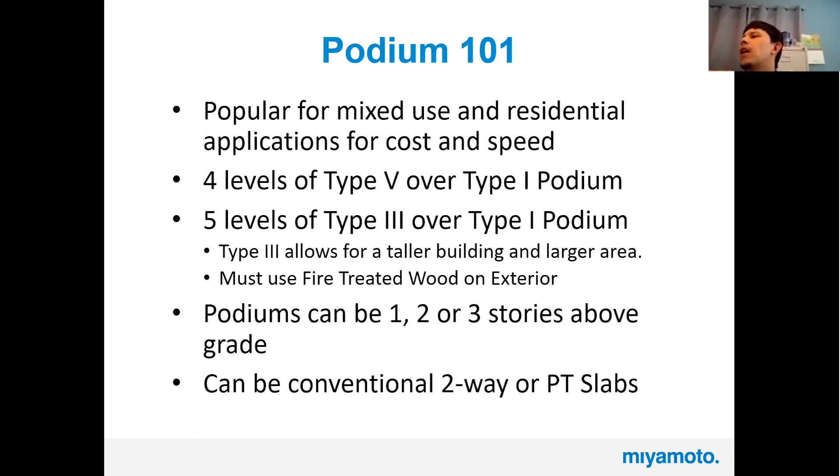The podium itself can be conventional, mild reinforced concrete slab, or it can be a PT slab, and I'll go over the differences here. PT slabs, very economical for multi-story residential and parking, especially if you've got a regular grid layout and multiple floors. You get some economy of scale. You can reduce slab thicknesses significantly, especially if you've got parking and or residential live load where you're talking about 40 or 50 pounds per square foot.

When it comes to an actual podium where you're placing a 4 or 5 story building on top, the loading is significantly higher than you would have in a traditional high-rise concrete building. And so there you're not going to get that big of a decrease in slab thickness when you do PT. PT also, we can do longer spans. We can have longer cantilevers. And because the slab is tensioned, there's going to be less cracking.

The drawback is that with a PT slab, making modifications to it in the future, you need to always scan it to locate tendons before you core and drill. So on our projects in Southern California, usually in a mixed use project where we have commercial and retail use, the client does not want to have a PT slab because the tenants change. It could be a restaurant. They're going to core lots of holes. And as the tenants come and go, they all make modifications. And they don't want to have to go back and scan the slab every time they do that.

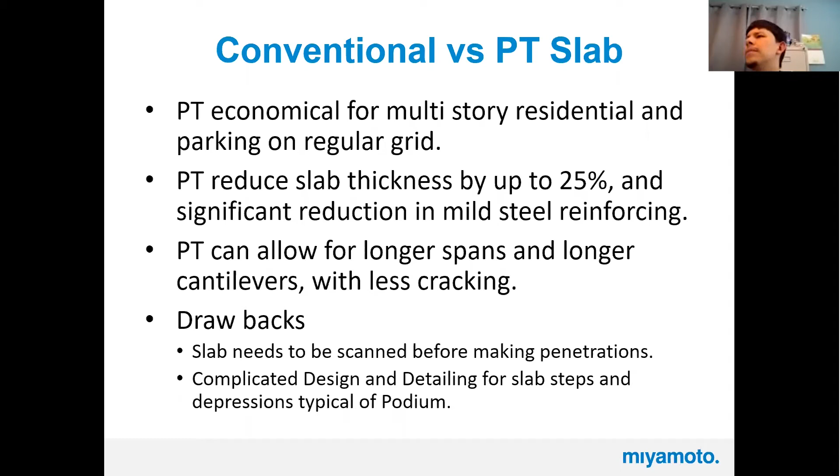The basis of the podium is that we're going to be able to do low-cost wood construction on top of the concrete podium, and we do that with this 2-stage analysis procedure. Most people just take it for granted that they're going to be able to apply this, but you do technically have to check. I've had trouble, especially with double podiums. It's turned out to be really, really close that we actually meet this requirement of the podium being 10 times stiffer than the wood superstructure.

So that will kind of be a function of how open the floor plan is on the podium level, because a lot of times, the architect is thinking that it's pretty much an open floor plan at the podium. They don't give you a lot of shear wall to work with. And then if you don't have enough stiffness there, and typically also the podium level is taller, right? So you have kind of like a soft story condition, then your stiffness may not be actually meeting this requirement. So you do have to be mindful of this.

When you get to a triple podium, it's even harder. And I've seen a lot of engineers, they've got different tricks for trying to meet this requirement. But just check it before you promise doing too tall of a podium.

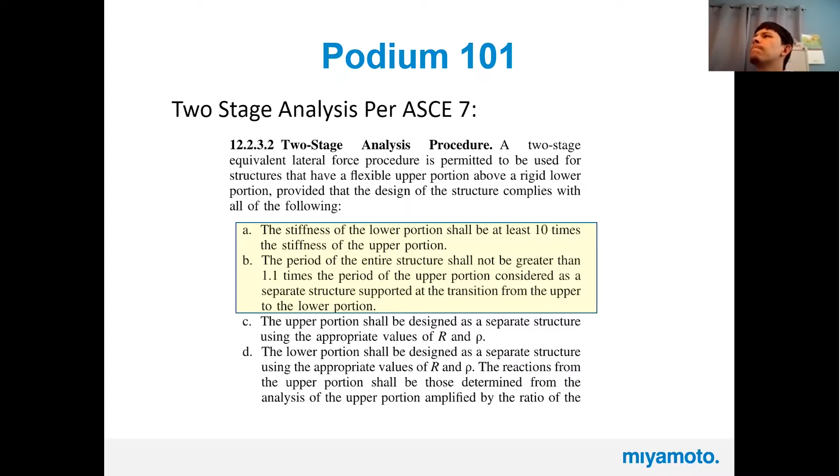And typically you're going to try to get your podium to work without drop panels and without edge beams and interior beams. It's usually a flat plate. So that's kind of where you start to get your preliminary sizing.

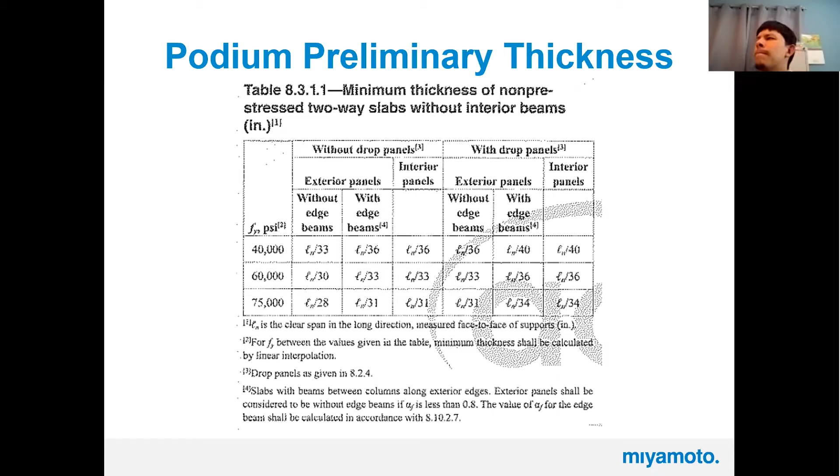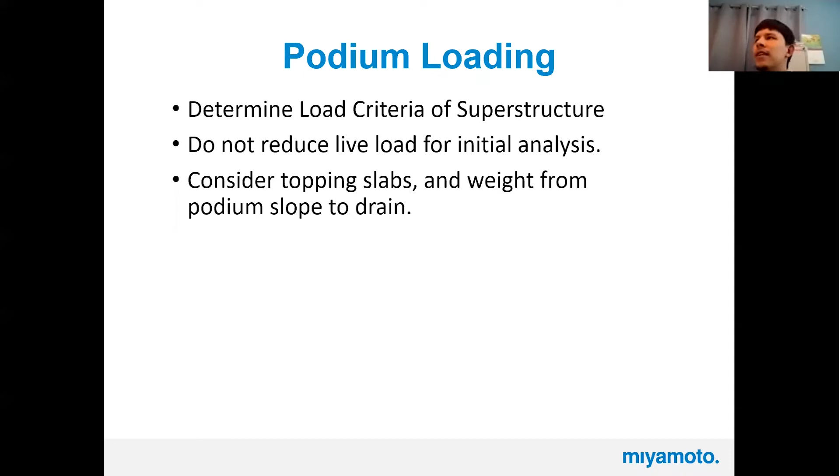Then you have to determine the load from the superstructure. When you do your initial sizing, I recommend that you do not reduce the live load. So, think, for example, if you've got 5 levels of residential framing, that's 40 pounds per square foot on each of those levels live load. That just adds up. So when you do that initial analysis, I would recommend that you do not reduce that.

And remember to consider all the other load that you might have. Something that's often overlooked is the topping slab thickness, or if your podium is having a variable thickness because it slopes to drain. So your podium might be 12 inches thick at the low point at the center of the courtyard, but it might be 18 or 20 inches thick at the edge of the courtyard, and that's going to add a lot of mass to your structure.

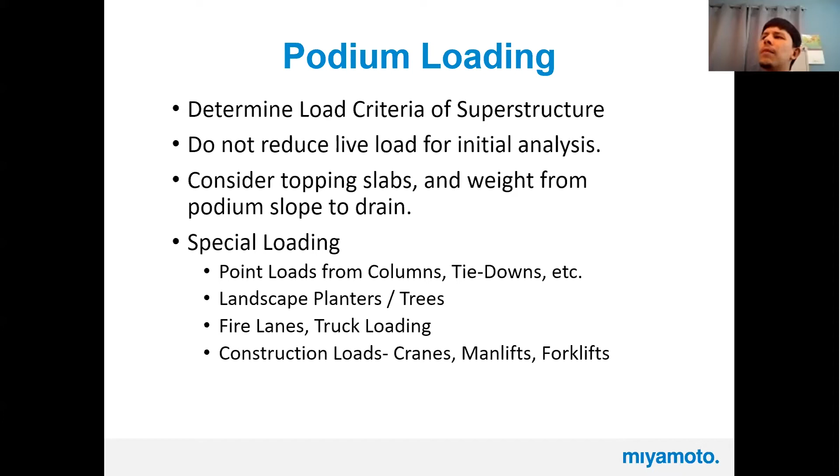The special loading that you'll consider in the design of your podium will be point loads from the columns, which you'll typically have at transfer areas, your tie down reactions from your shear walls, landscaping, planters, trees, fire truck loading, and then another thing that comes up is construction loads for cranes, man lifts, forklifts, that kind of thing.

As you get into the design, you're going to then have to figure out whether you need drop panels. And this is the first technical area that I want to get into. A drop panel has a very specific definition in ACI 318. Basically, a real drop panel is sort of a flexural drop panel. It will increase the flexural stiffness of your slab. But in order for you to reduce the amount of flexural steel you have in your slab, you have to meet the minimum dimensions in this code section.

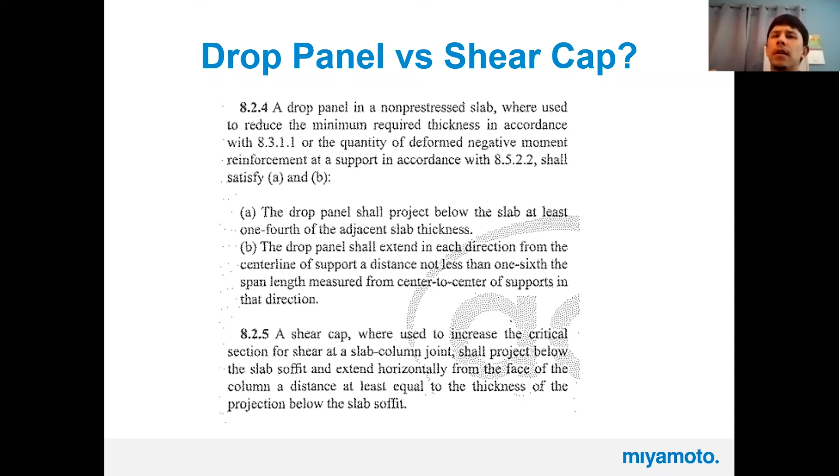And the reason why this is important is because SAFE does not know that. So when you model a drop panel in SAFE, it's going to account for that stiffness, and it will adjust the amount of reinforcing when it designs the slab for you.

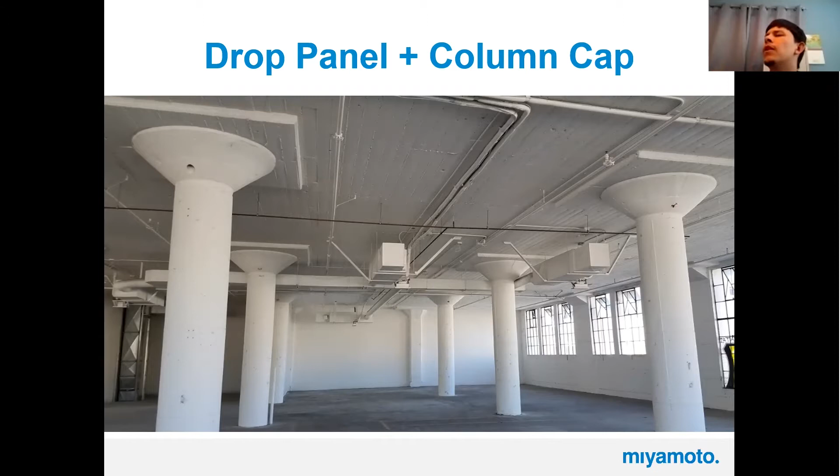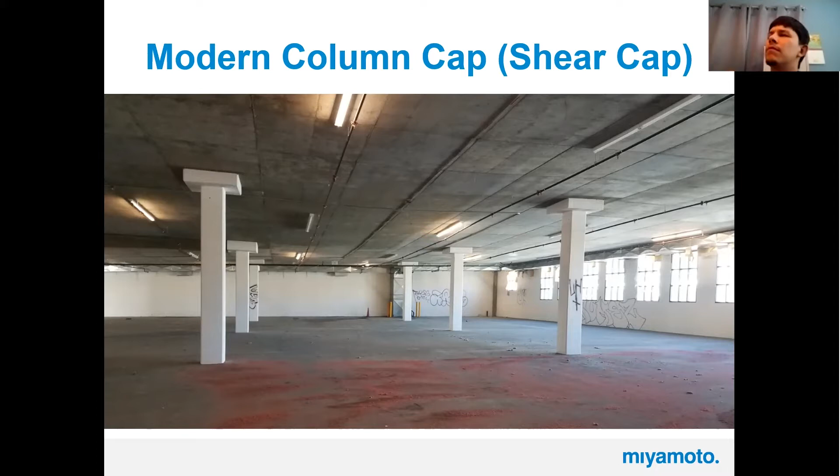So in the old days, this is how they would build a slab. You can see there's sort of a conical column capital and then a drop panel that goes around it. And then, in more modern construction, a column capital would be square because it's easier to form, and typically just placed to handle punching shear. But if these were going to be used as flexural drop panels, they would have to be much larger to meet that span over 6 ratio.

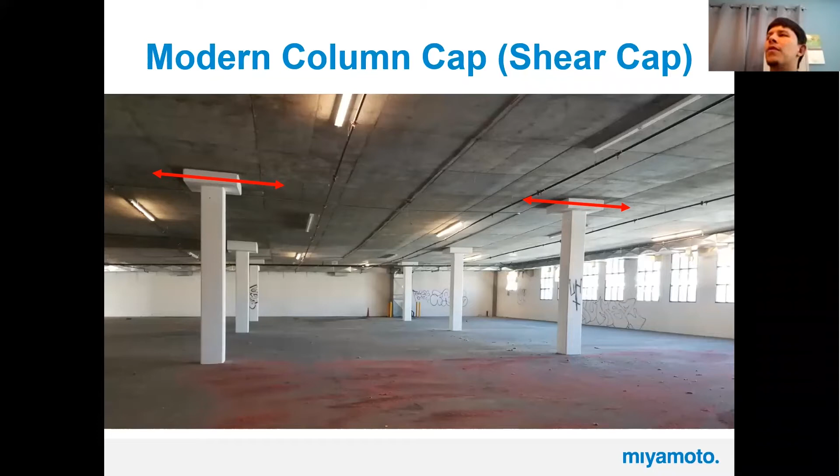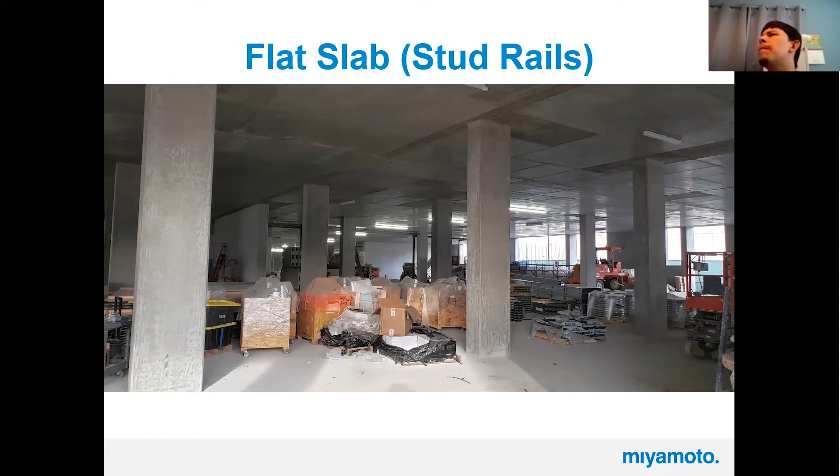When it comes to designing for punching shear, SAFE has a module. It's very generic though, and it might tell you, for example, that you need 7 stud rails, but for a square column, you're probably going to have an even number. We also use DECON stud rail, which is proprietary software. Their design is more conservative, but they are in the business of selling stud rails, so it kind of makes sense. So an economical design might be somewhere between these two.

The stud rails themselves, what'll come up during construction is whether you can install them upside down. A stud rail, if the mat reinforcing is put in place and they haven't put the stud rail in, it's kind of hard to get it into place. So a lot of times they like to just set them upside down, and that's usually acceptable.

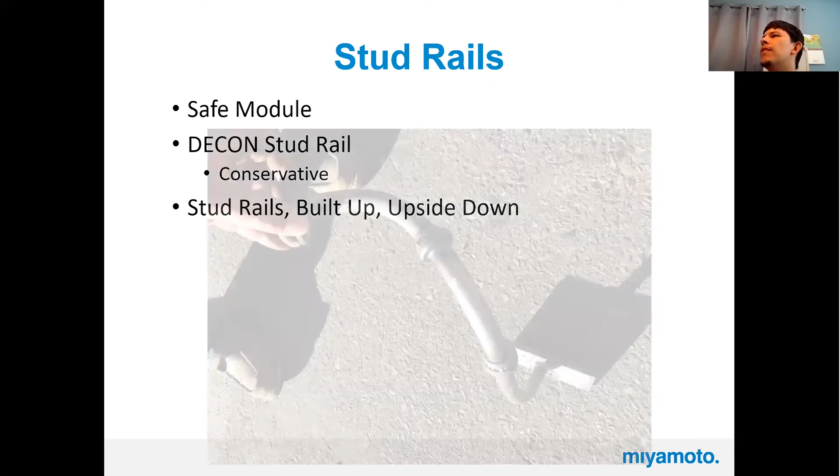This is a photo of a built-up stud rail. So this was placed at an area with high loading in a drop panel. So there was a drop panel and a stud rail, but nobody really manufactures stud rails that are tall enough. So they weld studs end to end like this, and then they bend test them to show that they meet the strength requirement. So this is just kind of an interesting photo that shows that.

A quick question. Is it common practice over there in the West Coast to do puddling at the columns, meaning higher concrete strength around the column versus the slab? Yes, it is. Typically the columns are going to be higher strength concrete than the slab. And ACI even has provisions that limit that delta between the slab concrete strength and the column, because typically you pour the column and then you pour the floor, but the floor is a different strength concrete. And then you pour the column on top.

I mean the drop panel area having a different concrete strength from the rest of the slab, not the column itself. No, only the column. The slab and the drop panel would normally be poured with the same strength as the slab itself. In Florida, also for high-rise flat plate, we used to do a lot of puddling, meaning we'd pour, letting it overflow out, a 10,000 psi slab area, and then the rest of the slab, whatever, 5 or 4,000.

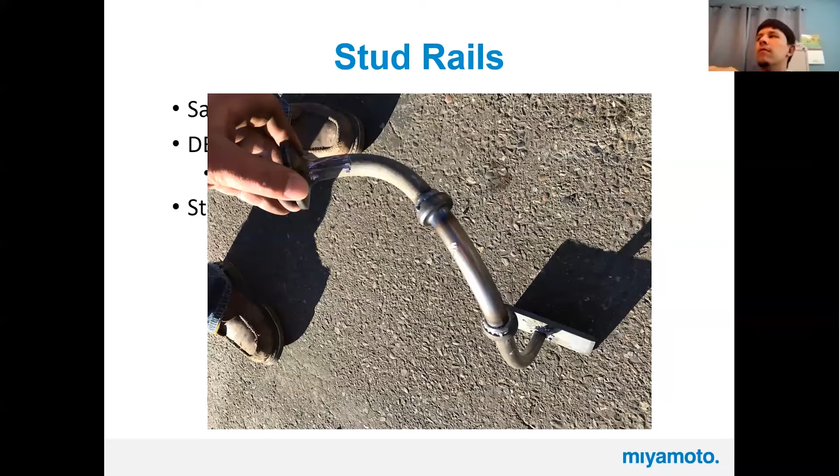Yeah, I think that definitely comes into play when you're talking about high-rise construction, because then you've got much more demand on your columns. But usually for podium columns, the loading is pretty light, so they're not generally even very heavily reinforced columns at all. Not much more than minimum, really.

Yeah, all right, thanks. No problem.

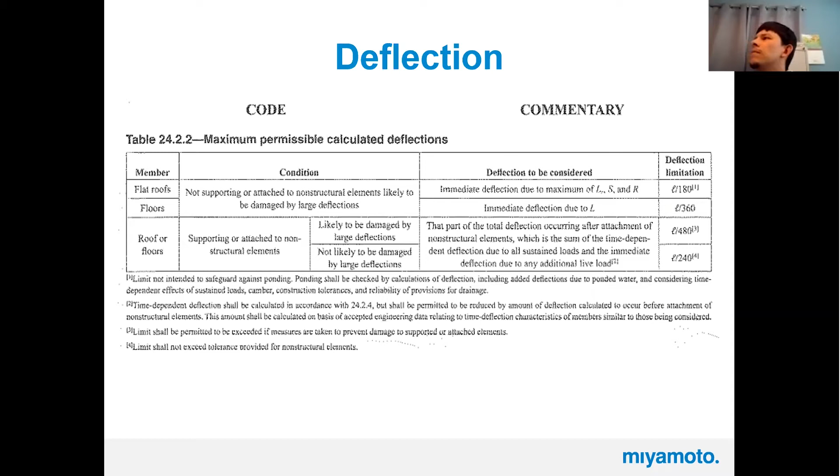The next area I'd like to talk about is deflection for podiums. There are serviceability requirements in ACI. This is just an excerpt. It's pretty typical: immediate deflection L over 360 and total L over 240. But what you always have to consider is the long-term deflection. Using this formula, if you've calculated the elastic initial deflection, you take that number and generally multiply it by 2 or 3, and that will give you your total long-term deflection.

So when you're designing concrete elements, don't be fooled by the initial deflection output you get from ENERCALC or any of the programs we use, because that's not going to consider the long-term deflection unless you've set the program up to analyze that for you. Typically when we do podium design in SAFE, we take advantage of SAFE's cracked and nonlinear analysis to calculate the deflections for us.

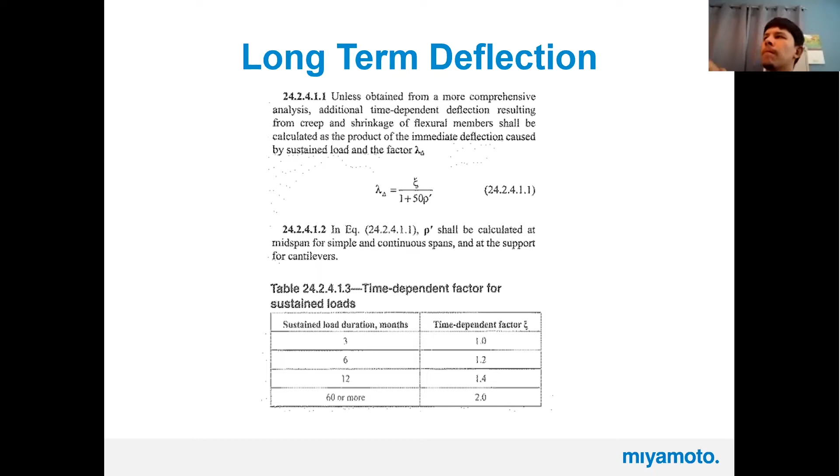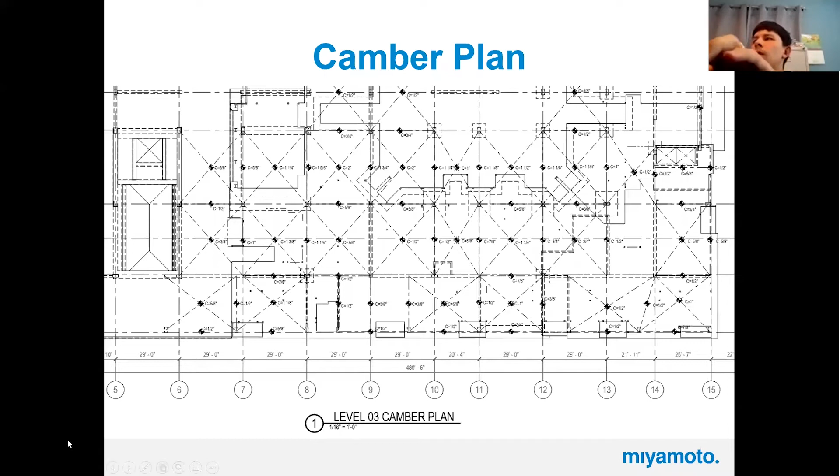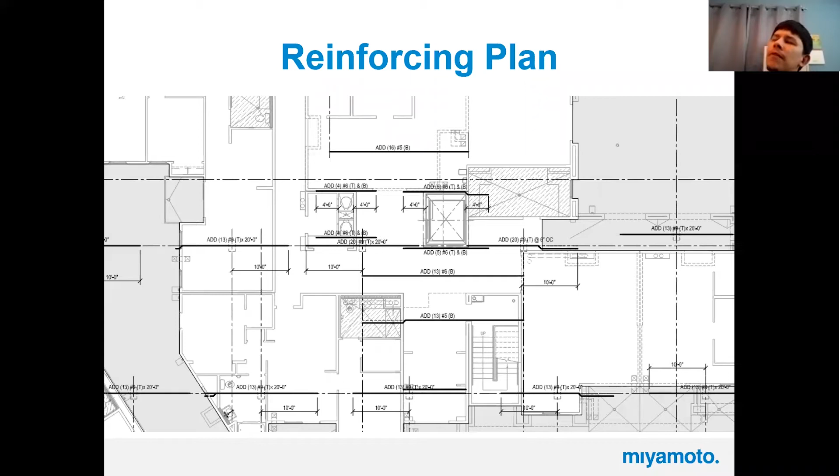Another thing to consider is if you do have depressions, show your rebar with a kink in it if you want them to provide rebar through that depression. If they're small depressions, less than an inch, usually you don't do that. But if it's a large depression, 4 or 6 inches, and you need your rebar to pass through, you either have to provide a special detail where you're lapping bars at different elevations, or bend the rebar at a 1 to 6 slope to pass through the depression. If you miss that, you might be facing a very large change order during construction.

Our tie-down reactions can be anywhere from 40 to 70 kips. So it's a really huge force. So we generally have to add a lot of reinforcing to restrain that breakout and keep it into the slab.

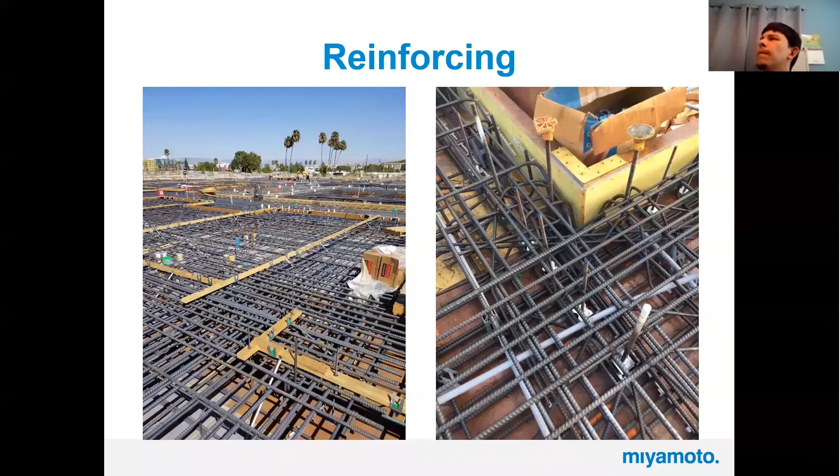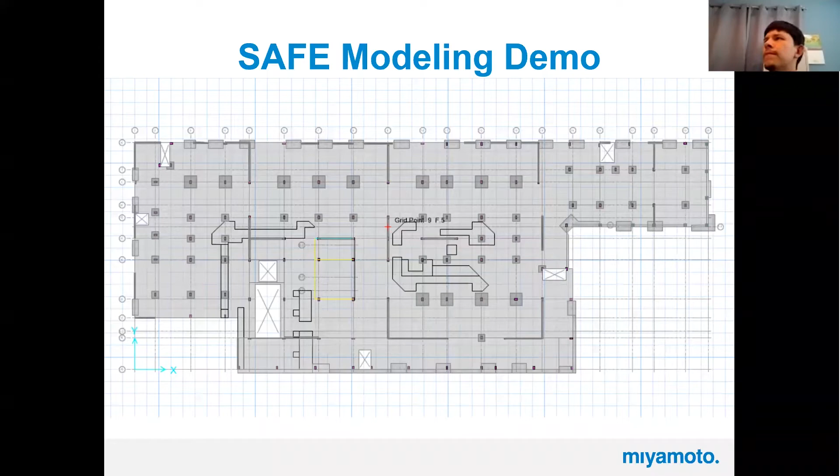Now I will transition to the SAFE model. This is just a screenshot from the Vario project, kind of showing the podium and the extents of the shear walls and the drop panels. Let's see here. Can you guys see the screen?

So this is a very simple model that I put together just for the purpose of this presentation. What it is is a rectangular slab with walls on 2 sides. So those could be basement retaining walls or shear walls. And then I've modeled a couple of different conditions as far as no drop panel, a larger drop panel, a small drop panel.

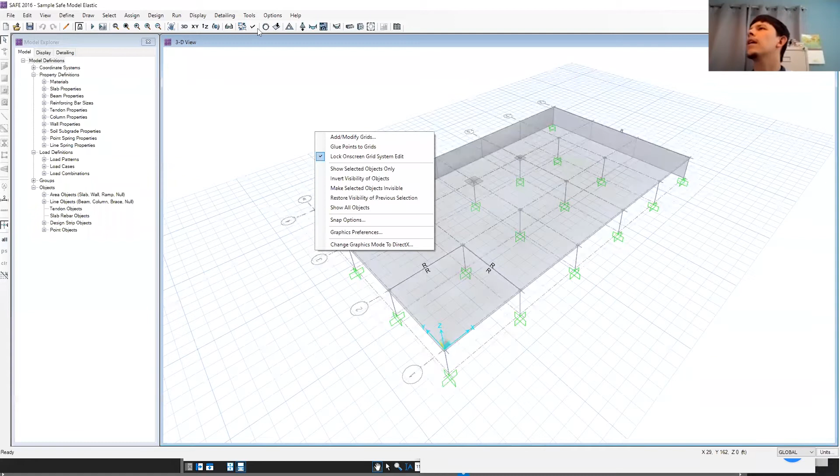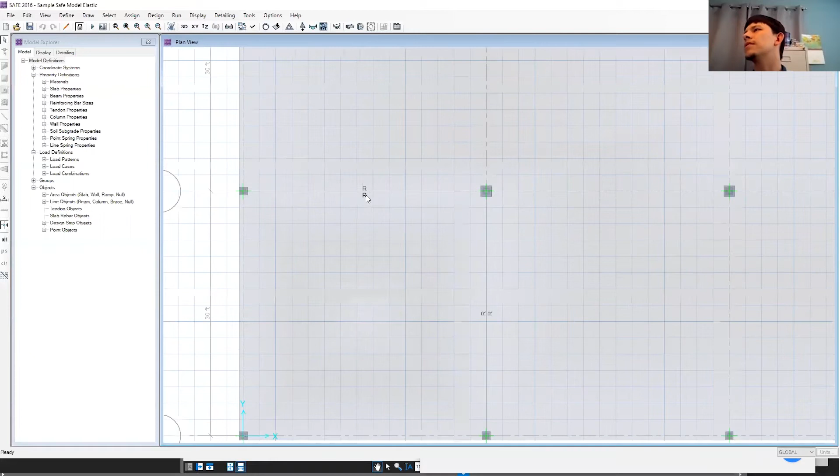And then I've also thrown in, if I zoom in here, an area of the slab which is dropped down from the rest of the slab. And I just wanted to demonstrate some of the modeling features in the program. On the screen, you can see this little R symbol. This is a release in the slab that you can model. The release allows you to release the moment in the slab so that the program will not consider the slab continuous through the joint. And that's how you're able to model, for example, a slab depression.

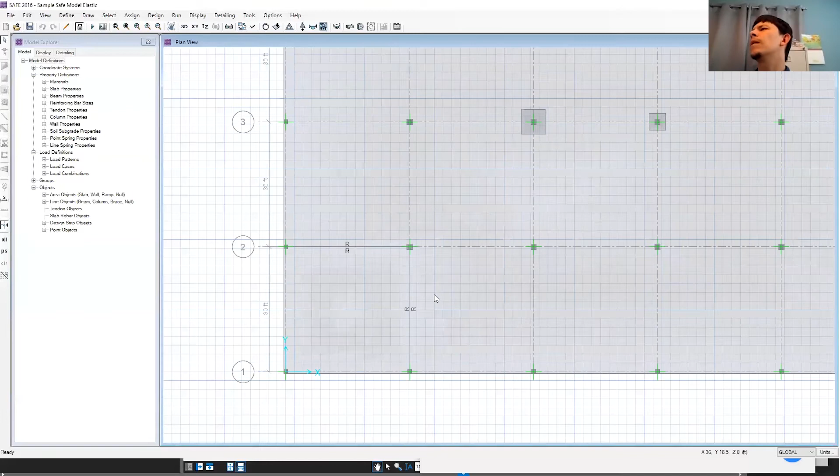Or if this was a parking garage and you had a sloped ramp, you could have the slab and then put a release between the 2 right where the ramp is, because the structure doesn't actually connect there. And then let's see if I can show you the column strips.

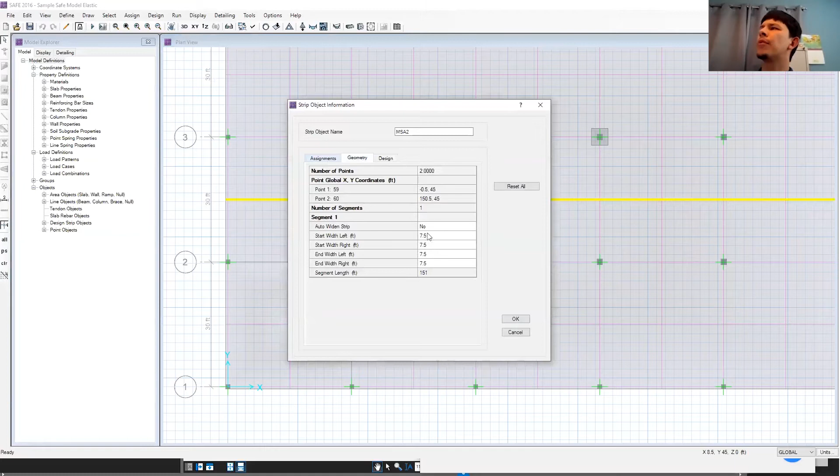These pink lines are the column and middle strips. The program can auto assign the width, or you can do it yourself. Usually in a typical project, you might not be able to get very nice column and middle strips. You have to use some engineering judgment in defining your middle strips. You might have 2 columns that are very close to each other, and perhaps you combine them into a single middle strip, or a single column strip.

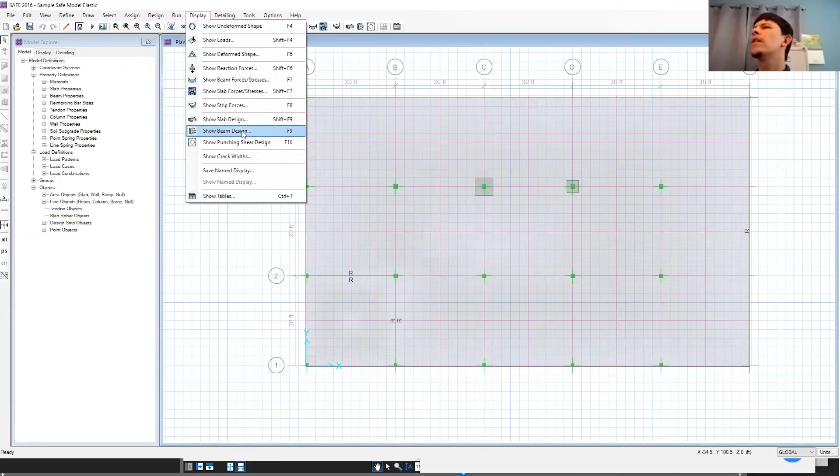And the program will integrate the finite elements along that strip to give you the reactions and the amount of reinforcing that you need there. And let me show you the design here. If I show you the strip forces, you can see this area where I've defined the releases.

The moment in the slab is 0 at the release, and then maximum at the center. Whereas in the areas where the slab is continuous, you have positive and then negative moment, alternating. For the connection to the basement wall, I've also modeled two conditions. Along grid line 4, I've modeled fixity between the slab and the basement wall. And then on grid line F, I've modeled it as pinned.

And I just want to let you know, in case you see that I've modeled something differently than you may have designed something in the past, it doesn't necessarily mean that your design is wrong or unsafe or anything like that. It'll just change the way that the forces are distributed in the slab. And as long as your reinforcing reflects your design methodology, everything will be fine.

So when you pin the connection between the slab and the wall, your design will tell you you need more positive reinforcing in the slab, right? Whereas if you're relying on that fixity, then you're going to need more negative reinforcing at the slab to wall interface, but the trade-off is you need less positive reinforcing at the center of the slab. This will come into play when you're looking at your detail between the slab and the wall.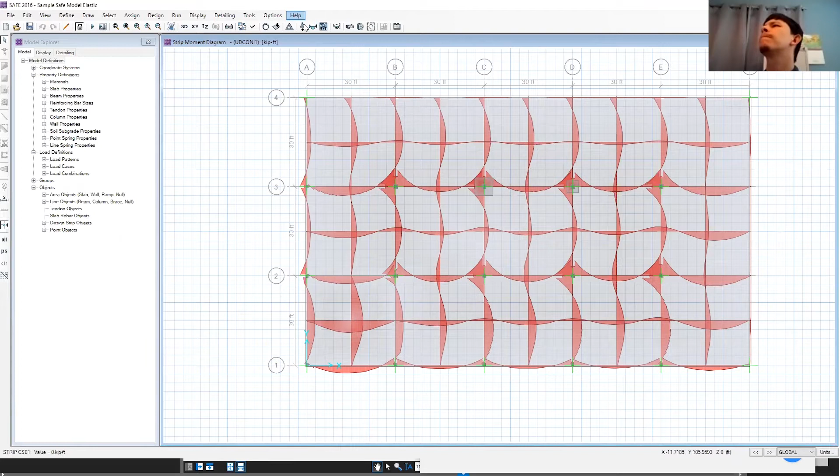Then I can show you punching shear design. So basically anywhere you've defined a beam, it's not going to calculate punching shear, so you'll see an NC. And then where I modeled nothing, it tells me that my punching shear ratio is way over 1, not going to work. Here I have a larger drop panel. My DCR is less than 1.

And then on grid line 2, I just modeled different shear stud configurations. And you can see that grid C and 2, it's basically telling me that I need 5 rails. But again, when you schedule that and put it on your drawings, you're going to have an even number of rails.

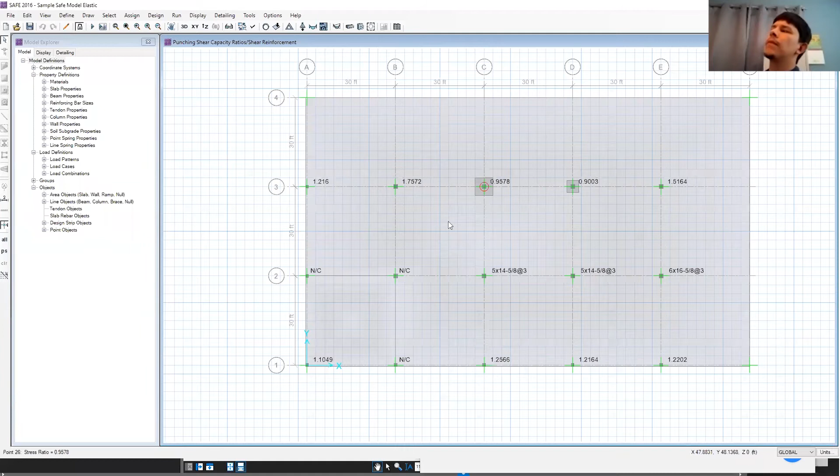For punching shear DCRs, I recommend that you keep them around 85%, unless you're able to coordinate very well all of the electrical and plumbing penetrations. So typically through a podium, you're going to have storm drains and electrical conduit and sewer lines, and architects like to bring those down near columns, so they're going to pass through your column capitals and your drop panels.

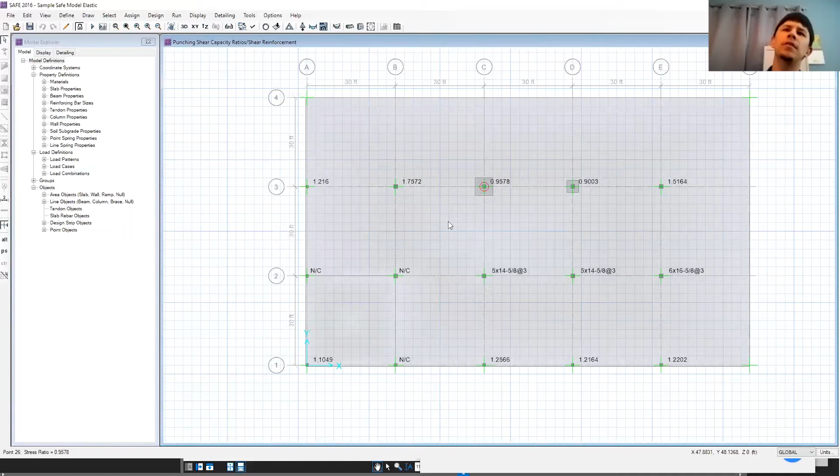So unless you've explicitly accounted for those penetrations and the reduction in your punching shear capacity, you want to have a little bit of a reserve there so that when you get the RFI later, you're able to justify that and not have a punching shear problem. Then, let's see.

For slab design, typically you want to find a sweet spot of your typical reinforcing and then just have the program output the additional reinforcing you need. And in that way, it's easy to put together your reinforcing plans. And what I like to do that also helps during construction inspection is I'll have my typical reinforcing be one size, and then my added bars at columns be a different size, a larger size. That way it's easy to count the number of added bars that are being added.

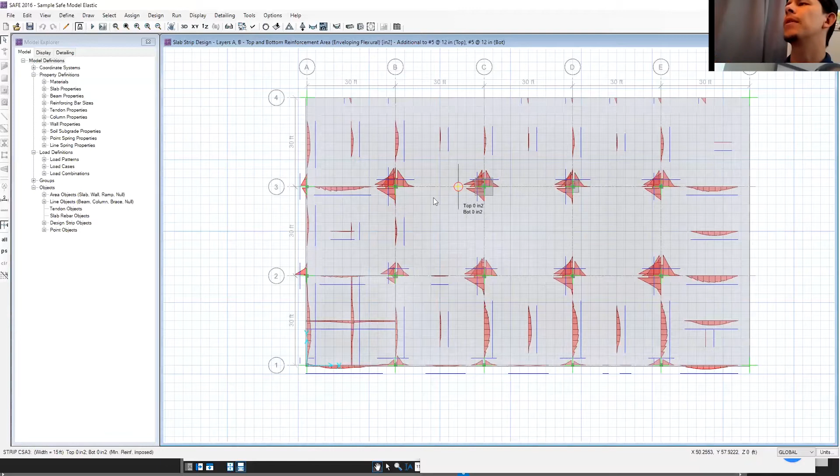For deflection, I have another model, and I've already run it because what I've done is I've defined these special nonlinear static load cases. And this is just following SAFE's best practices for modeling the correct behavior of the slab. So the first load case is basically a nonlinear load case that considers the correct properties of the concrete. And in order for the program to work accurately, you do have to tell it what your reinforcing is.

And if you look at the definition here, it's basically the dead load, the superimposed dead load, and the total live load. The second load case is the dead load and the superimposed dead load, but then only the probable live load, sort of the constant live load, right? Not your worst case live load. And that's usually around 25%, could be less, because the odds of you being at your full design live load all the time for the purpose of calculating deflection is unlikely.

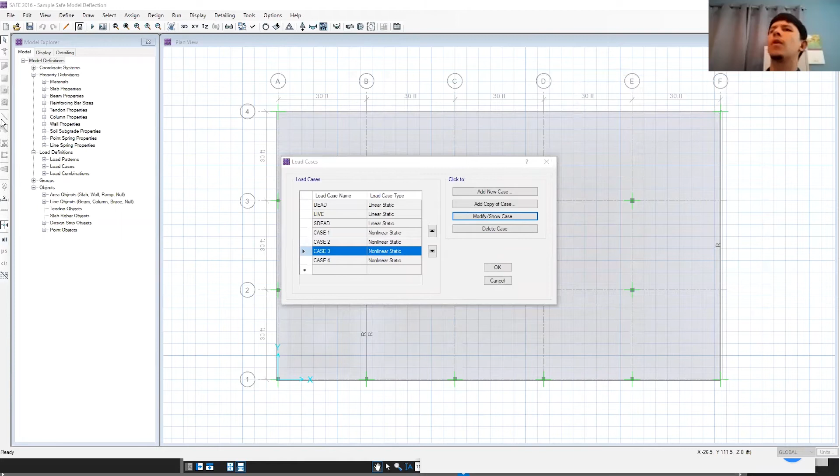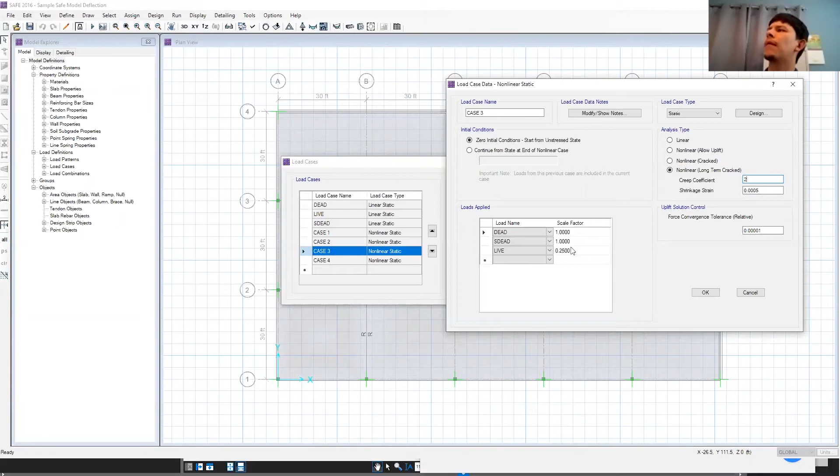The third load case that you need to define is a nonlinear load case, specifically looking at the creep and shrinkage. So you define the creep coefficient that comes out of that table in ACI that I showed you earlier, and a shrinkage strain. And it's the same dead, superimposed dead, and probable live that's defined here.

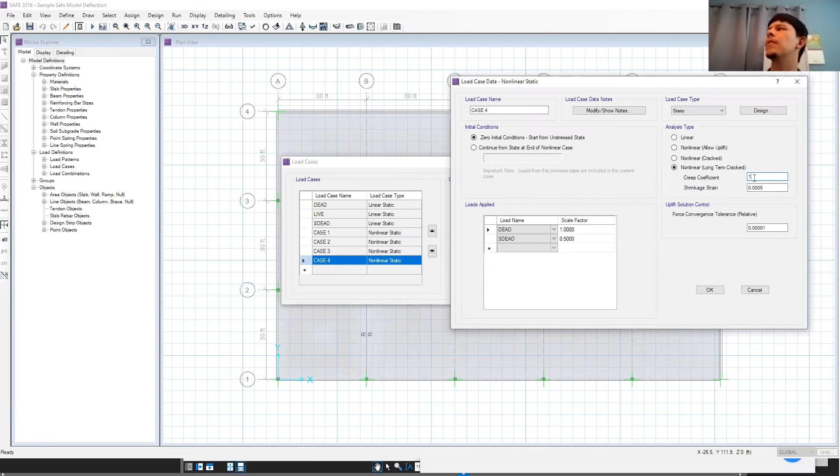And then there's a fourth combination, which is only the dead load and the amount of the superimposed dead load that the structure sees by the time that you start to load it with construction of your superstructure. So this is like maybe only 3 months into construction. So because of this being only 3 months into construction, my creep coefficient is much smaller because it's a shorter term analysis.

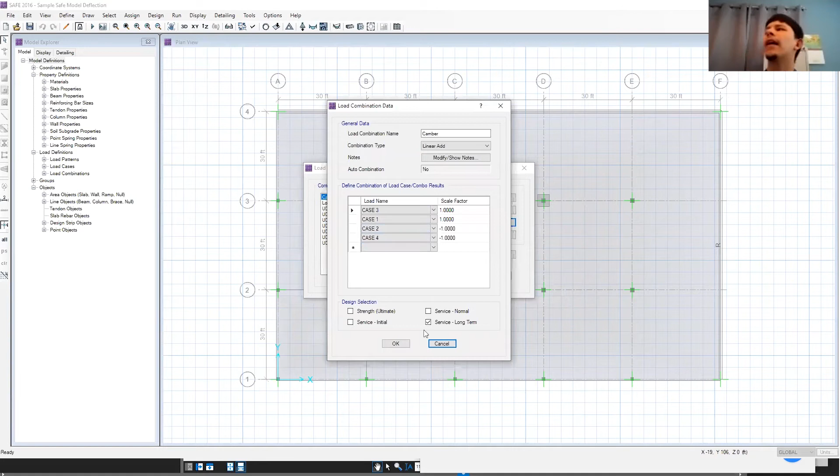So when you have those 4 cases defined, then you can define a combination which will give you your camber, which is basically adding the first and the third and subtracting the second and the fourth. And then that will directly output what you should camber. If you only want to know the total long-term deflection, you only need the first 3 load cases. You don't have to subtract out that initial deflection that occurred in the first 3 months of construction, right? Because it would have already happened by the time you start to install your superstructure.

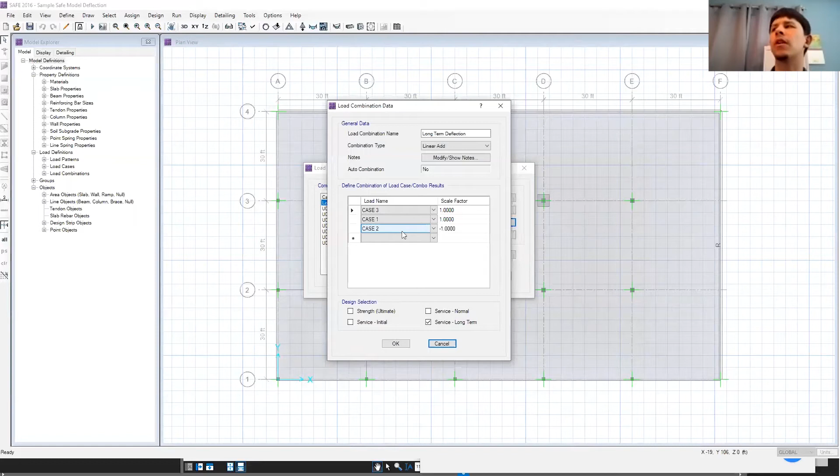And that usually, let's see if I can. So once you start doing nonlinear analysis, it takes a lot longer for the program to run.

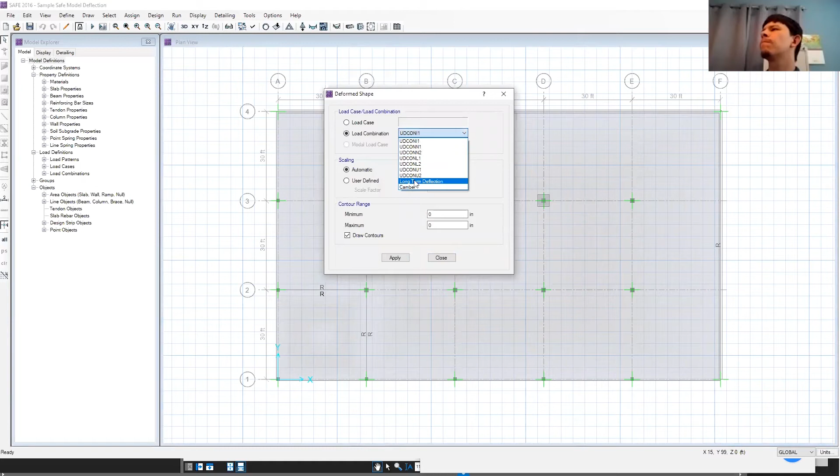But it will give you these nice contours. And when you look at your model, you'll be able to tell if your meshing makes sense and if your boundary conditions are correct. So that'll help you diagnose problems. So I do recommend that you spend some time to look at that when you're doing the first pass on

your model. Yeah, Phil, can you load the camber combinations again? The camber combination. This one. Mm-hmm. Yeah, so I can reply with a link for you guys to the long-term creep and shrinkage load combination.

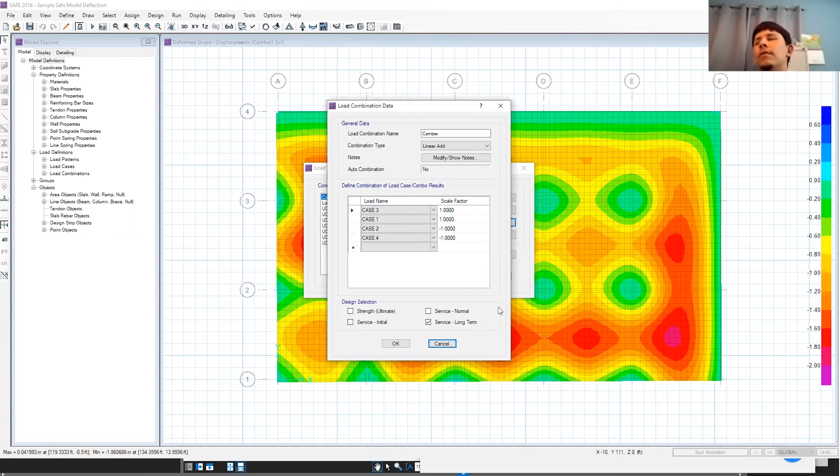Back to the old-fashioned way of doing it, you can just take your initial elastic deflection and multiply that by 2.5 or 3. But what you'll find is, specific to your project and your exact reinforcing and your slab thickness and your concrete strength, that number could vary a lot. And I'm finding that usually I'm getting a little bit more deflection with this analysis than by using the more prescriptive method in ACI. But I'm also trying to push the spans and keep the reinforcing as light as possible.

All right, thank you. We can talk about that later on. Let's see.

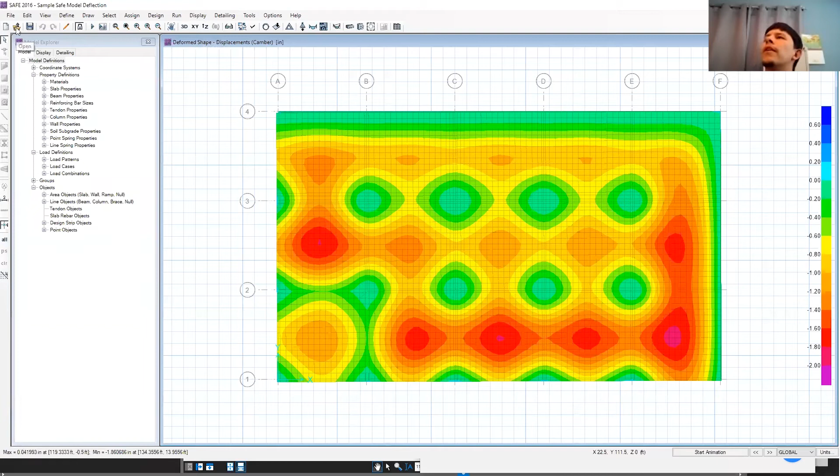So when it comes to actually modeling, I know a lot of people are big fans of the null areas, but I've done some really complicated podiums, and what I found is there's a lot of graphic display flaws with the program. When you start having a bunch of overlapping null areas with different loading on them, the colors start to get messed up, and sometimes it just won't display the accurate loads, and you don't know if it's a graphics problem or a modeling problem.

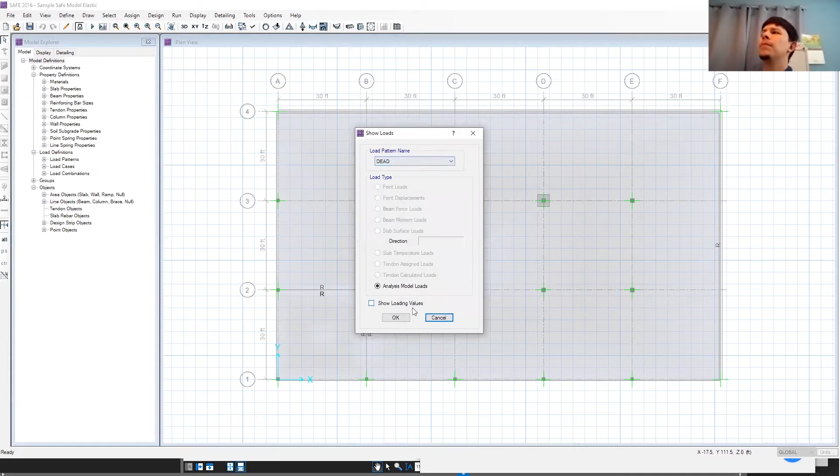So for that reason, nowadays I specifically model every piece of slab with a different loading as its own element, and I basically manually mesh them together, as opposed to drawing a big flat plate and then a bunch of null areas that overlap with each other.

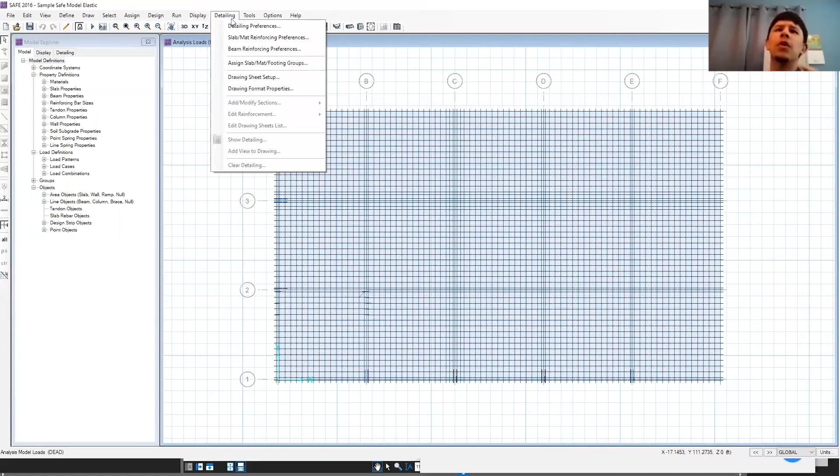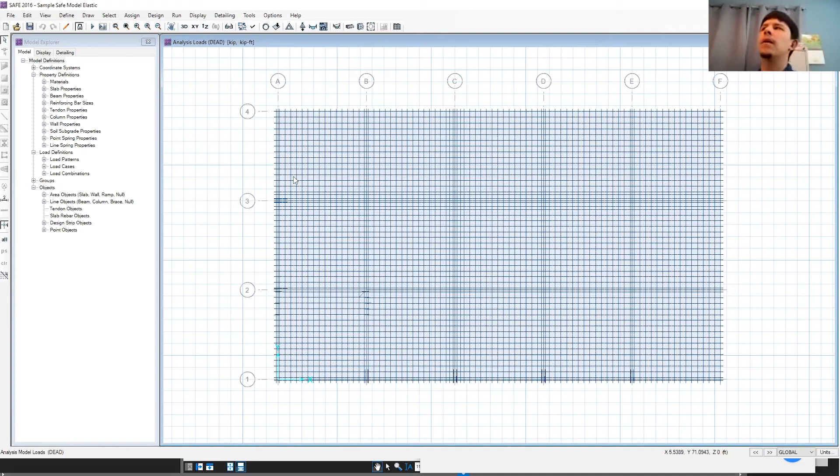So if the null areas have been working for you, then I think you can continue to do that. But I've learned the hard way that it's not worth it, because I spend hours trying to fix models where you look at the deflected shape and there's a piece of wall that's flopping away from the slab, or even in the slab, you'll see a break in the slab. And it's all because of the way the program does the meshing. So it's possible to lose accuracy there.

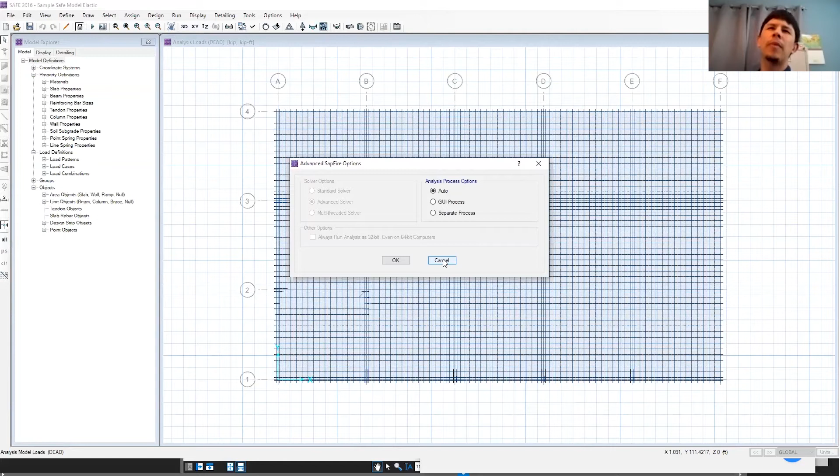So sometimes you've got to change your analysis method and use the standard solver, which takes a little bit longer, and then you've got to read through the whole report to find out what anomalies are in the model, and it'll output all the coordinates where nodes are not connecting. But it's very tedious, especially if you're far down the road and you have a very complicated model. You don't want to have to go back and fix 100 nodes one by one.

Under cracking analysis, this is where you would define the reinforcing you want the program to use when it checks those cracked load cases for you.

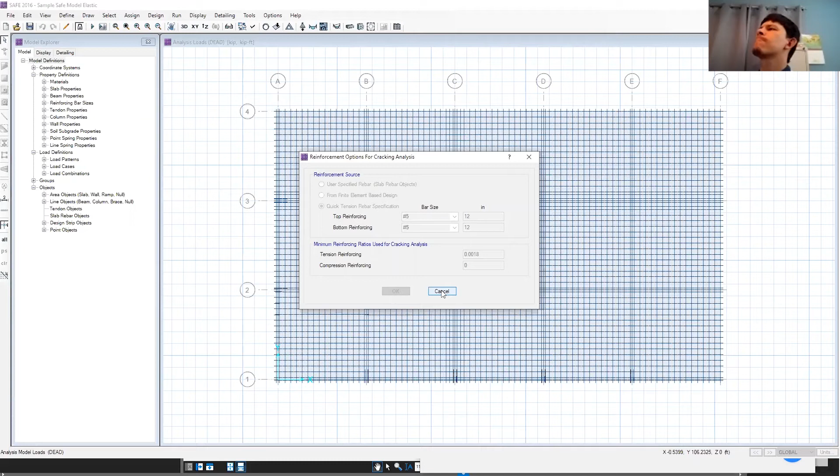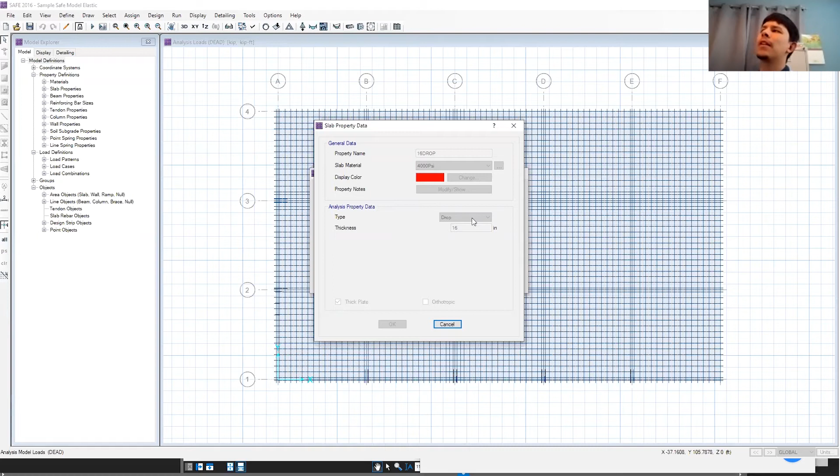And then when it comes to defining things like drop panels, the program allows you to define them. So there's a type here. When you select the type, the program has an order of preference. So a drop panel will take precedence over your ordinary slab definition. So when you model a drop panel element over a slab element, the drop panel element governs.

So that means if you had a 12-inch slab or a 16-inch slab, but you had modeled a 12-inch drop panel, the program will only consider 12 inches over that area, even though they overlap. So keep that in mind. It doesn't double them up. It doesn't add them together. It doesn't double the mass. Nothing. It just sets the order of operation based on the definition.

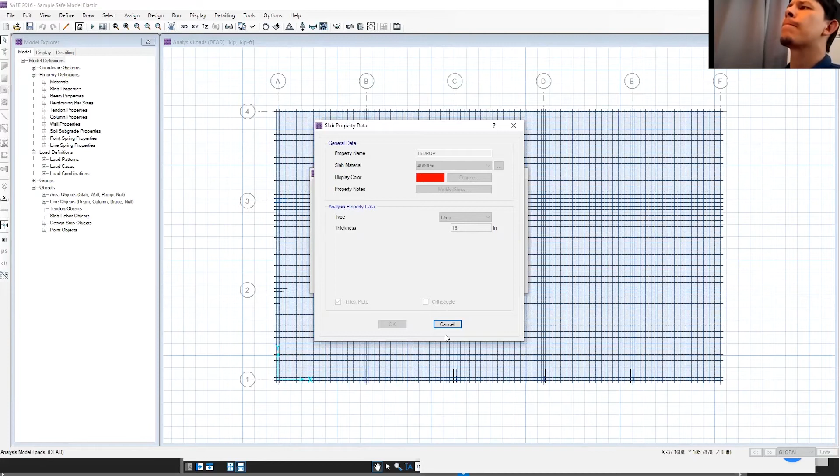And then if I show you the punching shear again, let me change. The design details for punching shear is pretty detailed. I've gone through and validated the output here by hand, and I was able to match everything pretty perfectly. I've done the same thing for Decon stud rail, and that's why I know Decon stud rail is a little conservative.

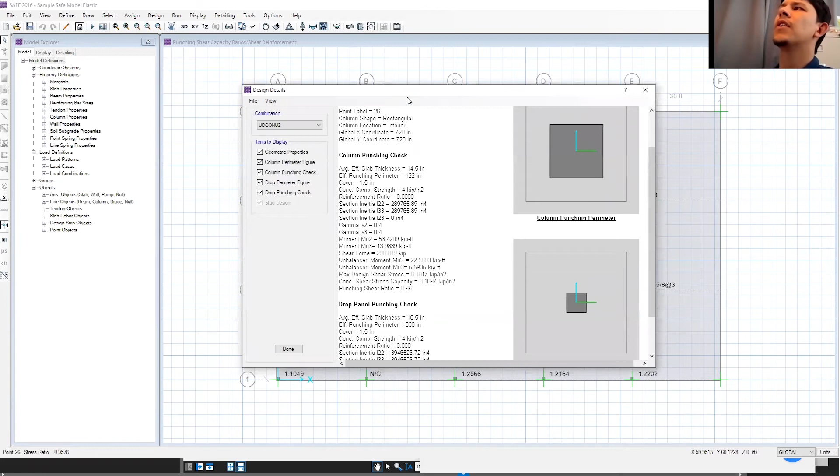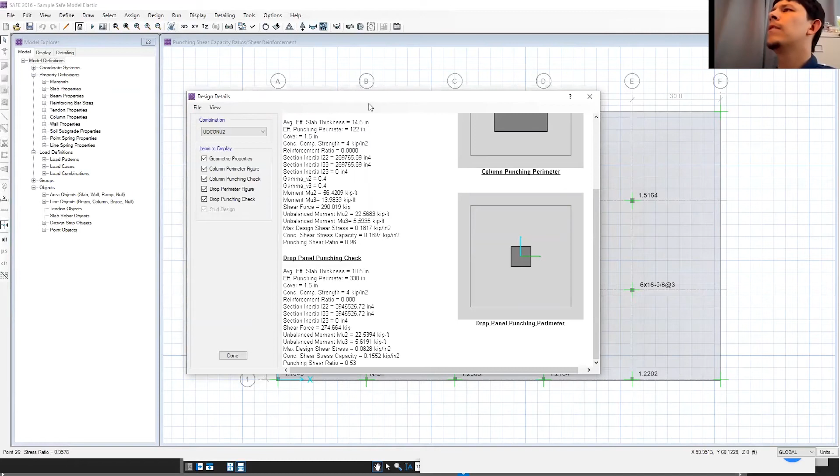But there are limitations to this module, especially if you wanted to do a punching shear calculation adjacent to an opening, or you have some weird geometry, then it may not calculate the correct punching perimeter. But then you can always pretty quickly do that adjustment by hand to do the design yourself if that's the case. Let me see.

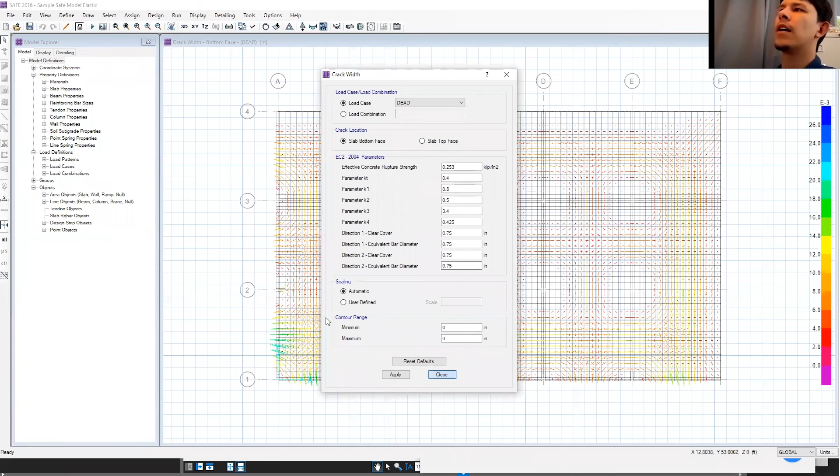There's a crack width module, which is pretty cool. It draws the contours and kind of estimates for you how wide cracks should be. So I imagine you can use this if you wanted to do some forensics on an existing structure. I've never actually used it on a real project, but it seems like a neat feature.

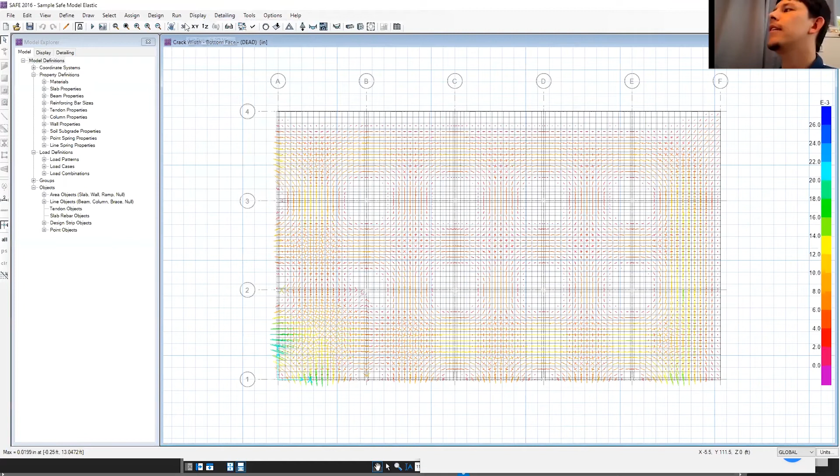And I think that's it. Any questions? Hello, Philip. Just a few things. This is Carla Binader. Yep. How's it? So a few things from using Safe.

First, for the punching, I didn't get a very good experience using it, especially with irregular shapes. I've used before a punching Excel that we had created a long time ago. I think it would need to be validated, but I think it's much more handy for special cases. For special cases, yeah. Especially since sometimes we don't use Safe. You do a hand calc. The punching shear module in Safe, at least for stud rail design, is definitely a newer feature for us.

And that reminds me, since you brought it up. Another thing to consider when you're detailing shear studs is a lot of times you have columns along the perimeter of the building. And if you're going to put a drop panel there, that could have an architectural impact. And it's not uncommon to have a column adjacent to a balcony where you might have a slab depression, or adjacent to the courtyard in the center of the podium where there are slab depressions.

And in that case, your drop panel heights may be different. So your punching shear area would be different. And even the stud rail heights from one side to the other side of the column may be different. So you'd want to pay attention to that when you're detailing and scheduling your punching shear reinforcing. Mm-hmm. Thank you.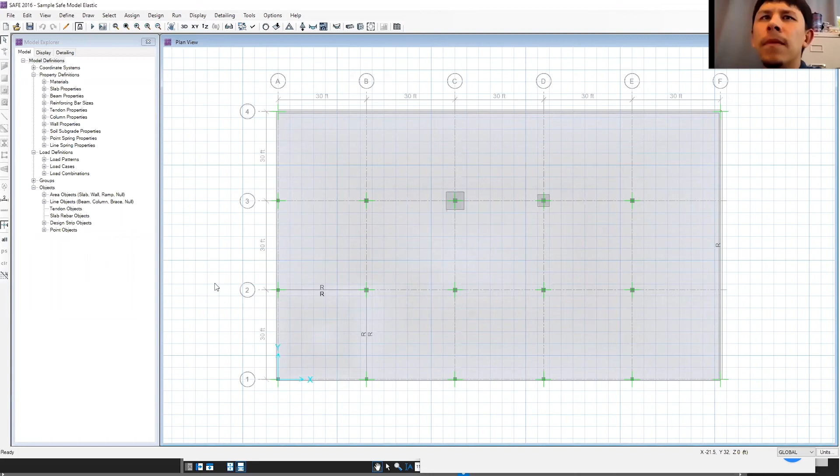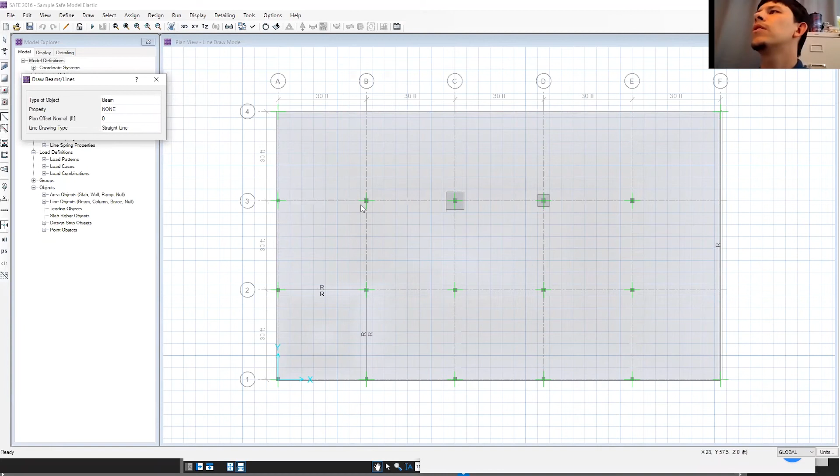Hey, Phil, this is Mike Campbell. Could you show us how you modeled that release at the slab depression? Oh, yeah. So this is a trick I actually learned from Danny. Let's see here. So you can basically model a beam element. And then when you select that element, under the properties there is a line release. When you click the release, you can define a shear release or a moment release. And you can define that on either side of the line.

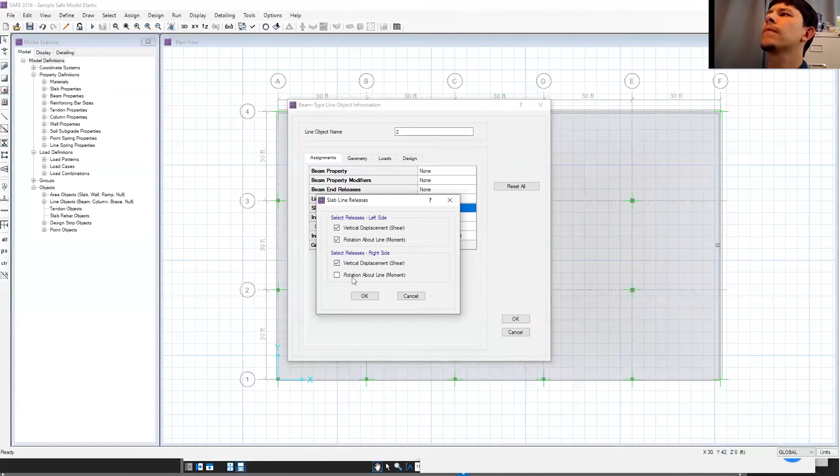Once you define that release, the program will cut it off either for shear or moment or both, depending on how you define it. Does that make sense? Yeah, great. Thank you. So that I think will help you a lot, because before I knew about this, I would always take a separate model, then model another little piece there and treat it as a giant opening. But now I can keep it all in one model. It's a little simpler from that perspective.

But after you run your analysis, you still take a look at the moment and shear diagrams to make sure that it's doing what you expect. Because like I said, you will run into problems where the program is not meshed correctly, and it will dump the load from a floating node into something that shouldn't have any moment, and that's going to be a modeling error. You can also define the offset. So let's see here.

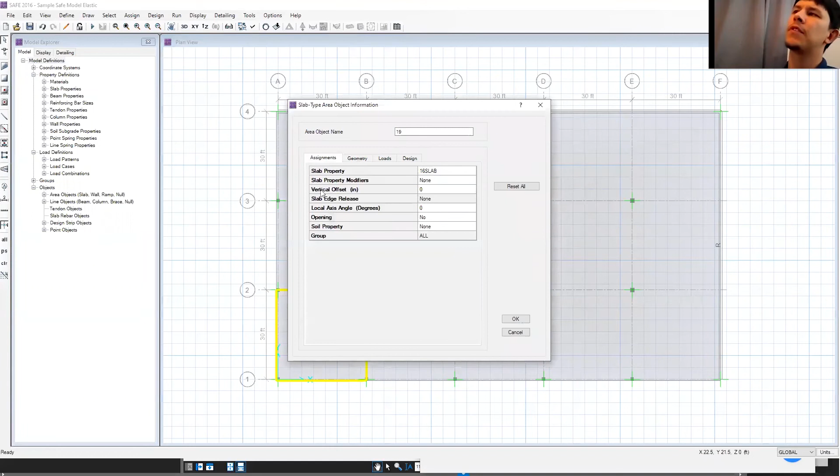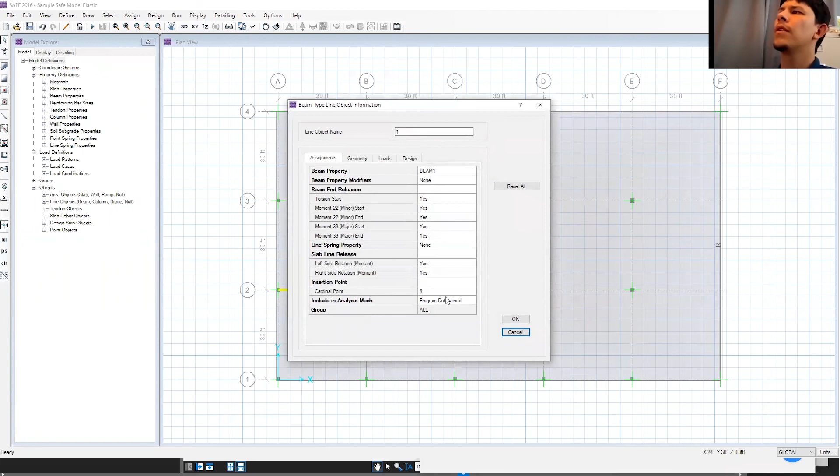You see how under the assignment there's a vertical offset, and there's a definition there. So that's how I was able graphically to move the slab relative to the rest of the structure, through this function. Similarly, with a beam, you can control the cardinal point for the beam.

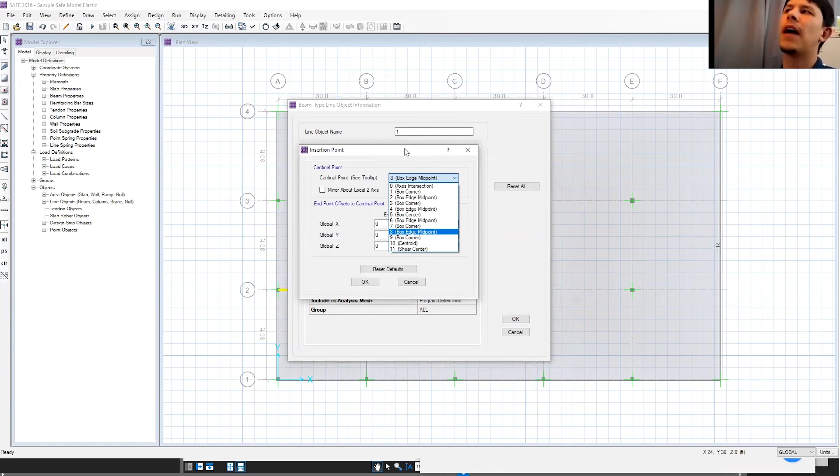So you can define whether that center line analytical model is at the center of your beam, at the top flange of your beam, the bottom flange of your beam, at the centroid, and then the program will adjust for how you define it. And then you can always check if it's working properly by looking at the 3D extruded view. Yeah, because sometimes it just doesn't work, and you won't know that until you check out the graphics.

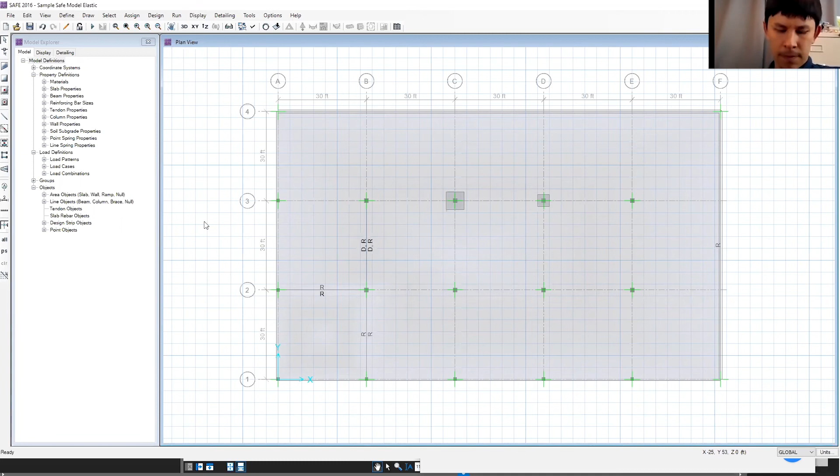Phil, we've talked about the analysis. Could you talk a little bit about what you see in the field in terms of podium design, how the cambers come out, and you mentioned the additional reinforcing for the hold downs, how does that work out? Do we have a standard detail that can just be used for all projects, or do we need to modify it?

Yeah, so I think we're getting really close to having what we would consider to be a good typical detail for the tie down anchorage. I don't know if anyone saw the invite. Simpson's doing a presentation on tie down anchorages soon, but now they're starting to use grade 354 BD anchor rods, which have a yield of 150 KSI. They're very high strength. But in ACI, if you go to the anchorage to concrete section, you're limited to 125 KSI. So as far as anchorage to concrete is concerned, you can't even really consider that higher strength.

But typically at that interface, the code will tell you to design for overstrength. But the second sentence is, or the maximum load that can be transferred to the structure. So basically, you want to make sure that tie down system is yielding above your podium. So a lot of times how we've achieved that is we will have a higher strength anchor rod into the podium, and then we'll step down to an A36 rod in the tie down, but a larger diameter. So it has the same strength, but it's going to yield before the higher strength rod.

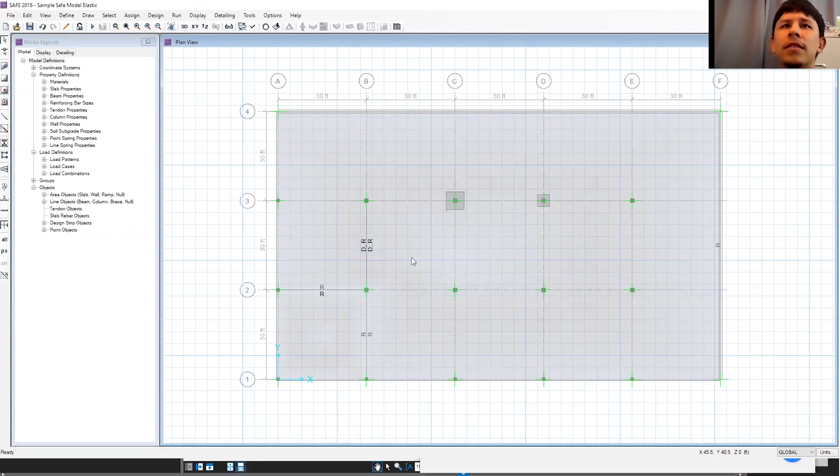That may work. But if it was missing into just a mat foundation and you have no access to the other side, it's really hard to do. You have to blow out a very large area of concrete, epoxy dowel, a ton of stuff, because like I said, the force could be as much as 70 kips. So it's a really huge number to be able to justify that it's going to work.

The other problem is when you're near an edge of slab, it's going to be hard to meet the minimum clear spacing to the edge of the slab, especially if you have a tie down rod that's, say, 1.5 inches diameter, and it's only 2 3/4 inches from the edge of your slab. This rod is so huge, by the time you put a washer on it, the washer actually sticks out from the face of the slab. And then good luck trying to get rebar around there, because you want to put some hairpins and breakout reinforcing.

So what I've done on some projects where I had particularly high loads is I've coordinated with the architect to have a larger edge of slab distance. And I've also done localized enlargement of the slab edge just around the tie down that we integrate into the design. That way I can get clearance around all the rebar. So that's how I've dealt with that in the field. What was your other question, DePonch?

So regarding the cambers, have we seen any cambers that have come out? Did we have an over camber situation with this? Yeah. So with cambering, the jury is still out on that as well. There have been problems, and they are usually related to the forms not being set at the right elevation. But as far as cambers coming out, I don't think we've had a problem with that. We've been very successful with that.

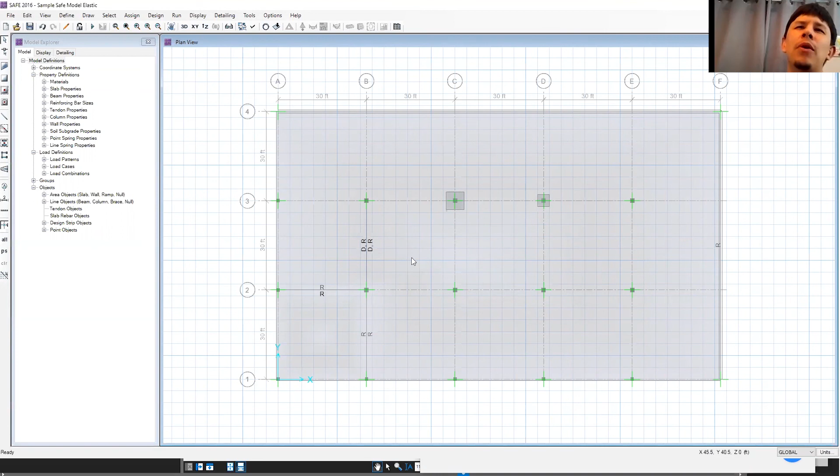And then another, probably could have a whole separate Magnitude 10 presentation just on detailing for podium depressions, because we've done that a bunch of different ways as well, and that can be kind of complicated. But generally, the builders want to have a flat soffit, right? They don't want to slope their formwork. But if you have a flat soffit and you need a slab depression and you need a slope to drain, then your slab might end up getting really thick.

So to keep that thickness down, in your courtyard area you might have to have a lot more drains, right? So that you don't have to build up as much to slope to drain. So that would be something that you want to coordinate early on when you start a podium project. Make sure you have adequate drainage, because you don't want to add those drains later. They do have a big cost impact.

And when it comes to that, it's really good to have the concrete guy on board already. If you're part of a developer team that already has their contractor, then you'll be able to get their preference. Because I've run into contractors that had no problem with sloping the soffit, and others that won't do it. So there is a component of means and methods as far as how to best detail the slab for a particular project.

On a side note, we had the Lombardi project that was 3 levels subterranean and 2 levels podium above grade, with 5 levels of Type III construction on top. That was the first podium project that I'm aware of that's ever been designed with fluid viscous dampers. So we designed it. The state was so excited about it. They had volunteered to pay for the seismic instrumentation. We had the dampers ordered, everything. And then suddenly and abruptly, the owner canceled the project completely. And now they're doing like a 30-story high rise on the same site. I was real excited about that one.

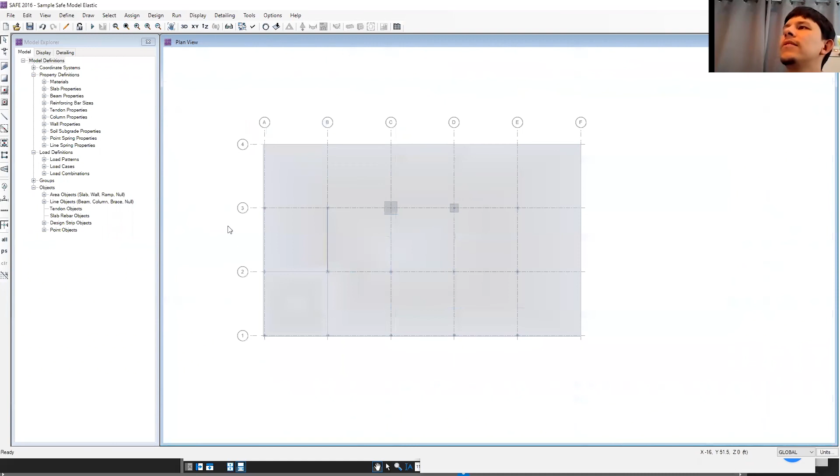We are doing a PT podium slab, and we ended up shaving about 1.5 to 2 inches off the thickness of the slab. Is that Picasso? No, that's for Upland Colonies. So we saved PT, and the contractor was very organized, so they only missed a handful of anchors and a couple of hold downs, where we had him do X-ray and just do through bolts there. So it worked out for us. That's great.

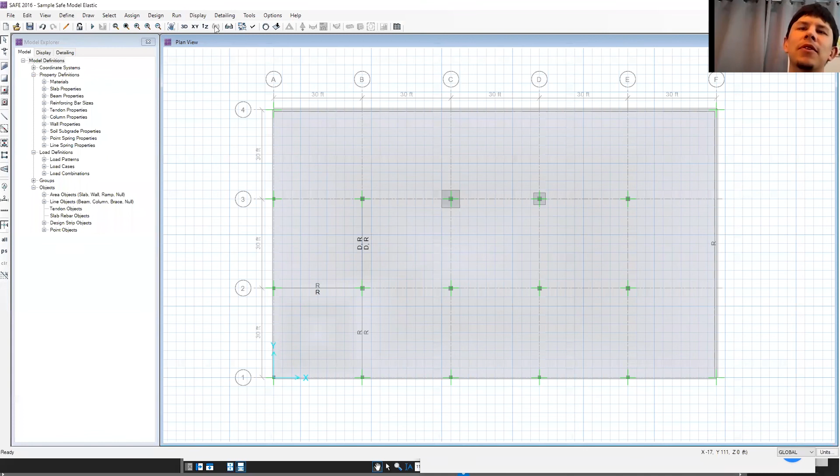So SAFE also has a detailing module; they'll generate kind of rebar shop drawings for you, but I've never had enough time to figure out if it was any good. Maybe if somebody else ever goes through that, they can share what they find with the rest of us.